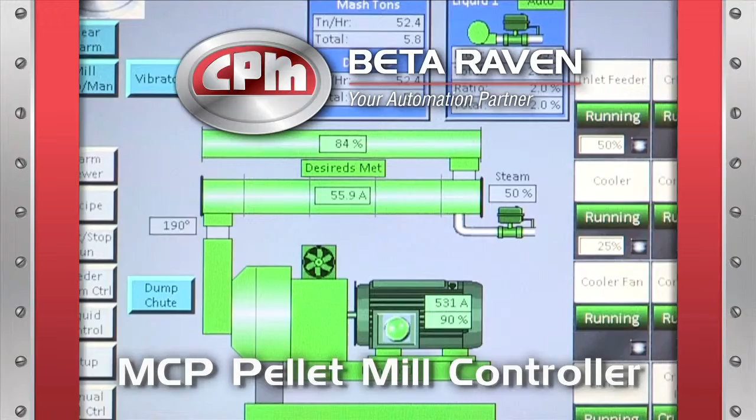The CPM Beta Raven MCP pellet mill controller is the ideal low-cost solution for pellet mill control. The MCP presents a real-time picture of the pellet mill being controlled and provides ease of use by leading the operator through the instructions necessary to control the pellet mill. The entire system is controlled by a user-friendly color-coded touchscreen.

With the MCP, most customers increase production rates, improve overall pellet quality, and increase die and roll life, all while reducing energy consumption, labor costs, and downtime. The three modes of operation for the MCP are auto, manual, and service mode.

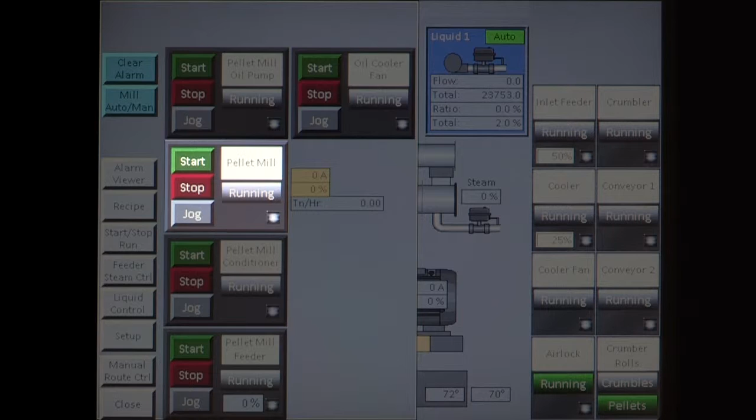In manual mode, the operator has the ability to directly control each piece of equipment: feeder, conditioner, oil pump, pellet mill, and cooler. By clicking the Manual Mill Control button, the operator can now access the start-stop controls for each piece. The equipment connected to the Beta Raven MCP is interlocked to prevent human error. You can see even in manual mode, you cannot start the pellet mill motor until the oil cooler fan and gearbox oil pump are up and have been running for 30 seconds.

Here is a sample of starting the oil pump. When the oil pump starts, it automatically kicks on the oil cooler fan. When the oil pump is up, the on-screen countdown starts to tell us when we can start the pellet mill motor. This is just another way that the MCP helps you to protect your equipment.

If you would rather run your MCP in auto mode, simply click the Mill Auto Manual button in the upper left-hand corner of the screen. A confirmation box will pop up and you can confirm the switch to auto.

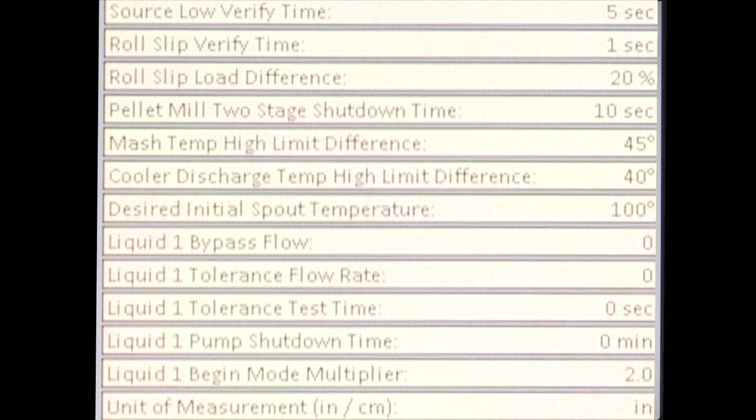Continuing in auto mode, next we will set the system parameters and pellet mill settings. This is something that usually does not need to be changed but is easy to change if needed. The setup screens also allow for the calibration of motor loads and flow rates. You can also tune the PIDs, which is usually handled by the installer, and customize the motor descriptions for downstream devices.

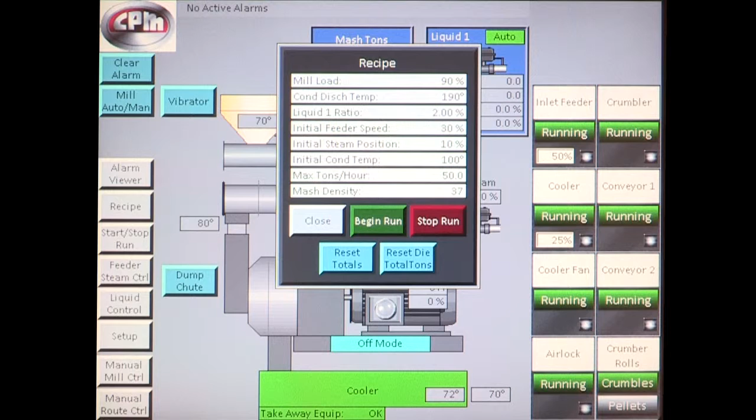Once all the setups are complete and tuned, to begin production, you will enter the recipe based on the product you are running. In the recipe screen, we can change things like the desired conditioner discharge temperature, initial feeder speed, liquid addition percentage, maximum tons per hour, and maximum mill load. If it is a brand new run, you will also reset your total so you are starting from zero.

Once the operator pushes start, the MCP does the rest. You can see the pellet mill motor load increasing to the desired settings. When that gets to the set point, the conditioner and feeders start operation. When the system is operating, the MCP will track the tons per hour on screen so the operator or management staff can make quick assessments of how the pellet mill is performing.

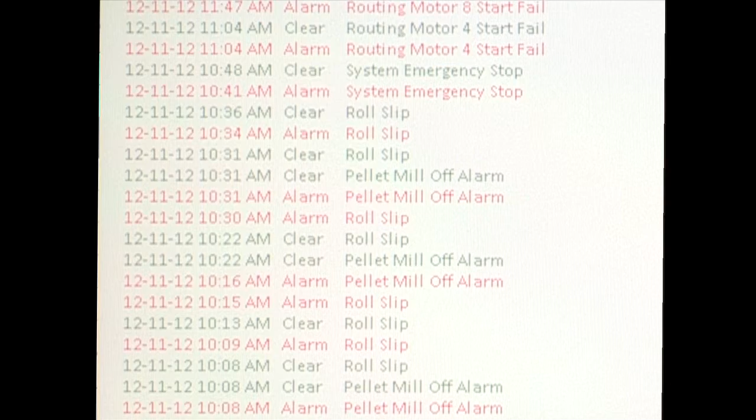The MCP provides control, event logging, and visual display for faults like a roll slip, a cooler high, or if the supply bin level goes low. Now let's take a look at what the system does if it has an error. Here we will simulate a roll slip. When the roll slip occurs, the MCP automatically opens the dump chute to drop the bad product and shuts off the conditioner and feeder.

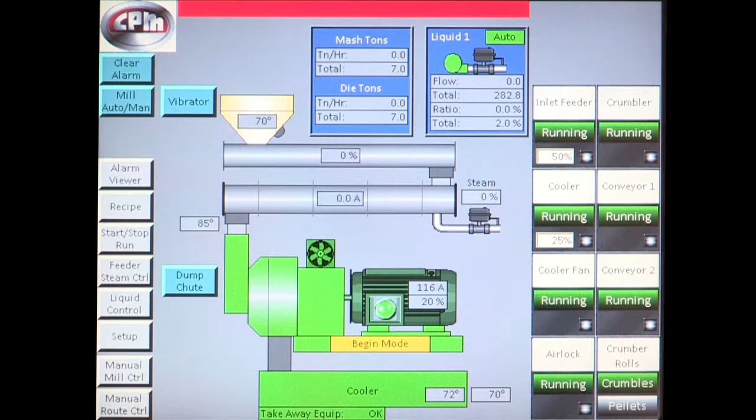The pellet mill and cooler will continue to run until the MCP senses that the slip condition has been cleared. Once the mill load gets back to idle for a set amount of time, the dump chute will close and the MCP will jog the conditioner to make sure it is cleaned out. Finally, the feeder will start and you will be back up and running in full auto mode. The roll slip alarm will continue to display at the top of the screen and is logged into the alarm log until the operator or manager clears the log.

Here are a few more system fault examples. If a system registers a cooler high condition, the MCP shuts down the feeder and the conditioner until the cooler level is back to an acceptable level for proper operation.

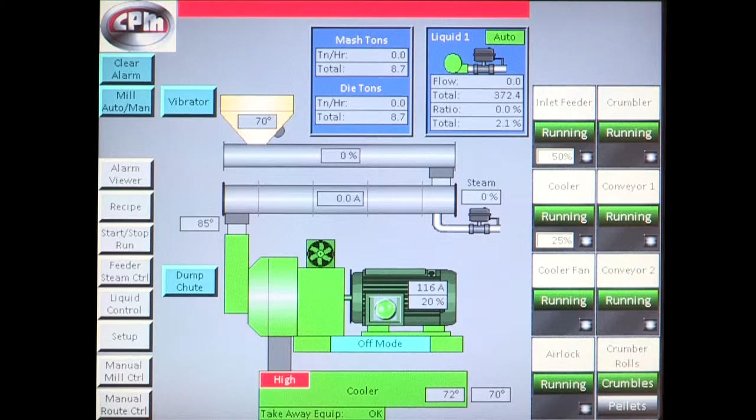Another feature is that the MCP compares the cooler product discharge temperature and the ambient temperature to make sure the cooler is working properly. The operator can set the system to alarm at a temperature of their choice and tell the pellet mill how they want it to respond to the high cooler temperature, either slowing production or shutting the entire system down.

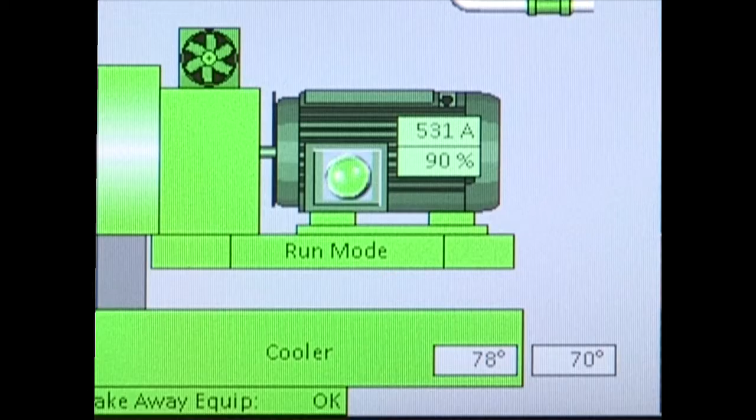Finally, if the system registers a low supply bin level, the system will ramp down the speed of the feeder and conditioner while activating the bin vibrator to try to get product flowing into the system again. If the supply bin is empty, the system will shut itself down in a controlled, predetermined order.

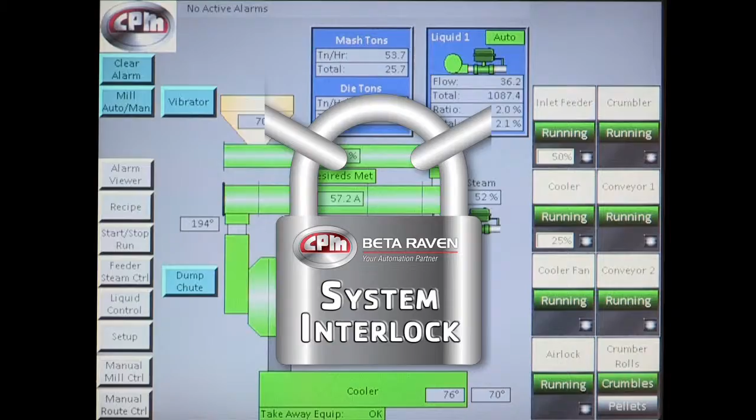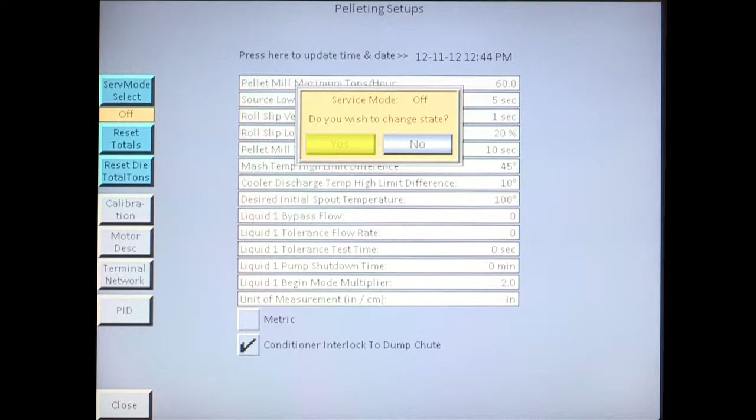As we discussed earlier, when the system is in manual or auto mode, the entire system is interlocked to prevent operator error that could damage the mill. However, if the operator needs to verify the condition of a single piece of equipment, they can by entering service mode. Service mode allows individual devices to be started or jogged without energizing the entire system.

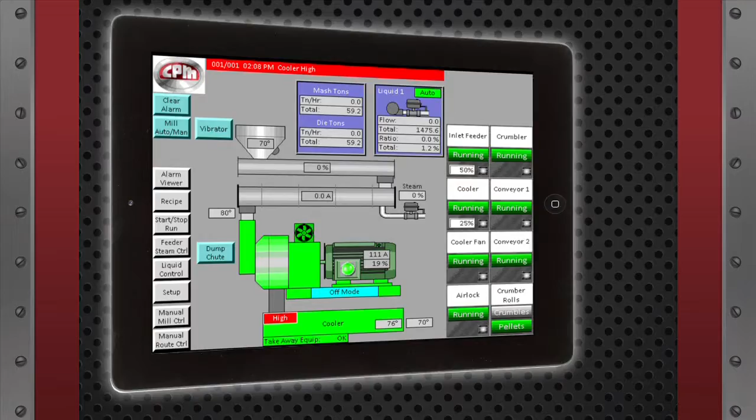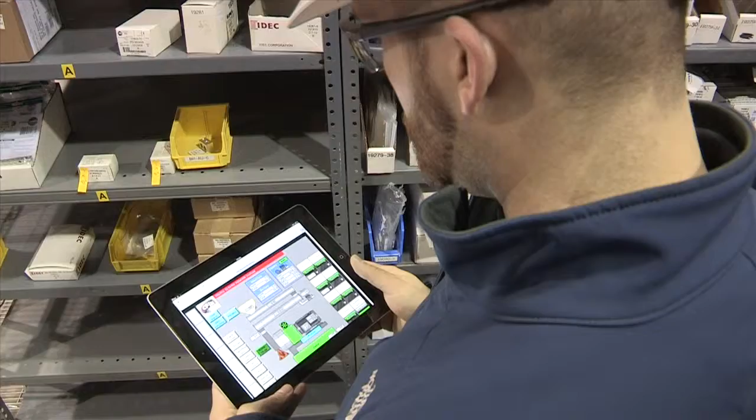Another extremely handy feature of the MCP is the ability to control it from an iPad or other mobile device by accessing the existing Wi-Fi network. The operator can check and perform any task, including viewing productivity of the mill, adjusting the recipe, or checking and clearing error messages. If there is not an existing Wi-Fi network, Beta Raven can provide a Wi-Fi network for an additional cost.

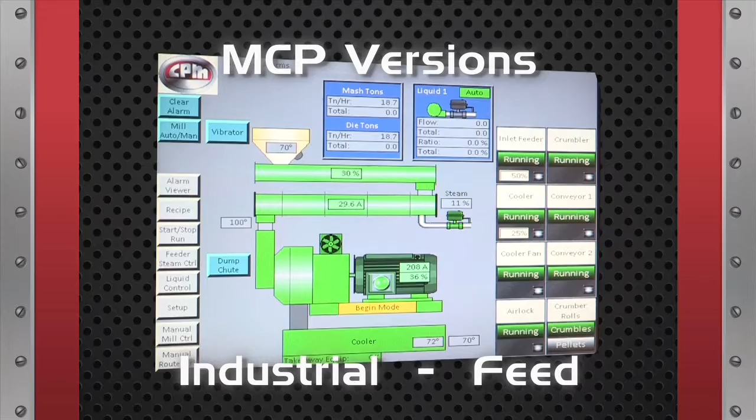There are two different configurations of the MCP, industrial and feed. Your CPM Beta Raven sales rep will help you to determine which configuration best fits your needs. CPM Beta Raven MCP pellet mill controller, taking your production to the next level.